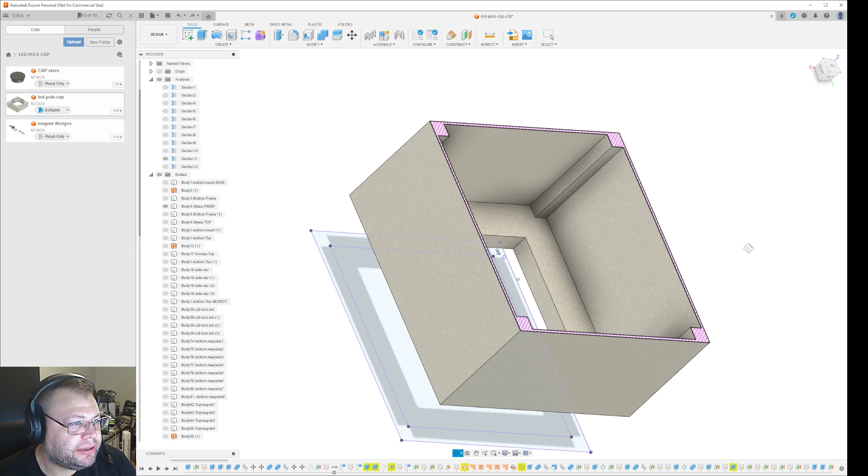So I have this model in Fusion 360, and what I found out is something I wish they could implement is what I would call a negative fillet. A negative round fillet, because if you use a fillet on this edge, naturally it would only be possible to make an outwards fillet. What I really want is to make this fillet inwards. Sorry, because I want to make like a smooth circle here from this surface.

Now the reason I put this is because I had to make the wall smaller, and when you then make it so small you actually get an opening on the side here, because it's too small when you get it down to a certain width. So in this case the wall is just 1 millimeter. And I want to round the edges inwards. I don't want them to sort of stick outwards.

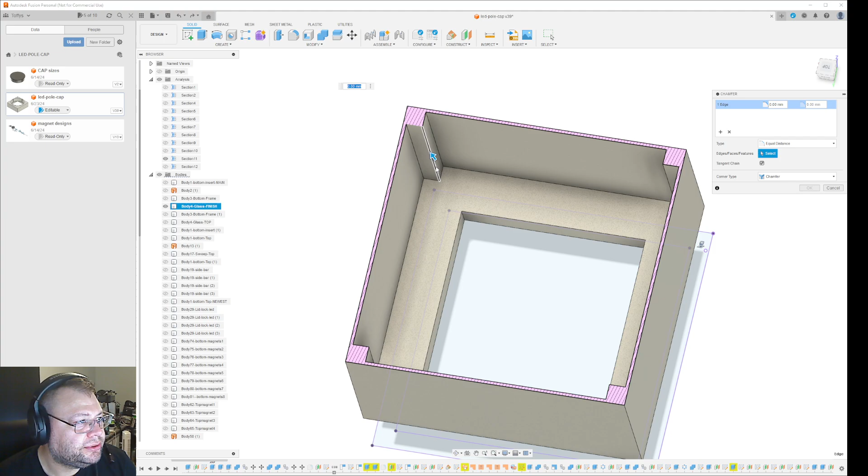Now the only way you can normally do this is by using fillets on inside corners. But if you fillet this one, you will only get it there in the middle. So the way I go around this is a small cheat. You have to do a chamfer first, because you have to remove that edge in a way. So you chamfer it and you bring it all the way back to the edge where there is nothing else, and then you just press OK. So now you have a straight side there, and you have two sides.

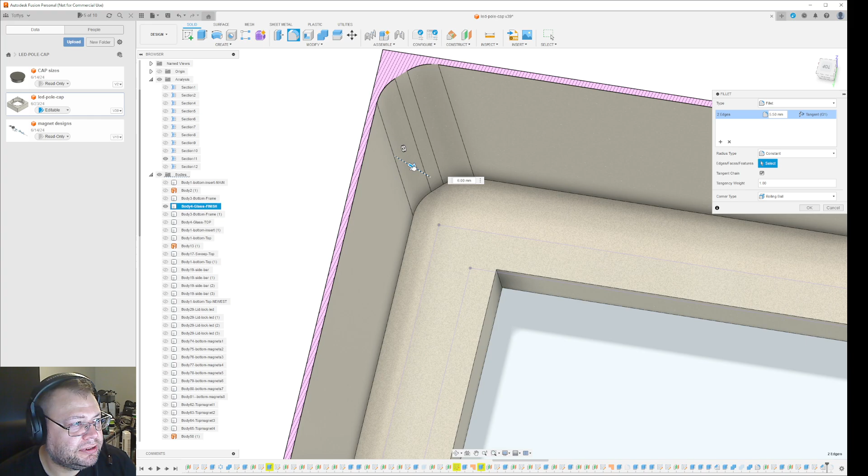What you can do now is that you can easily go in and do another fillet, but this time it will interpret it as sides that are going to give an inwards round fillet. So when you then push and pull, I will get a round edge instead.

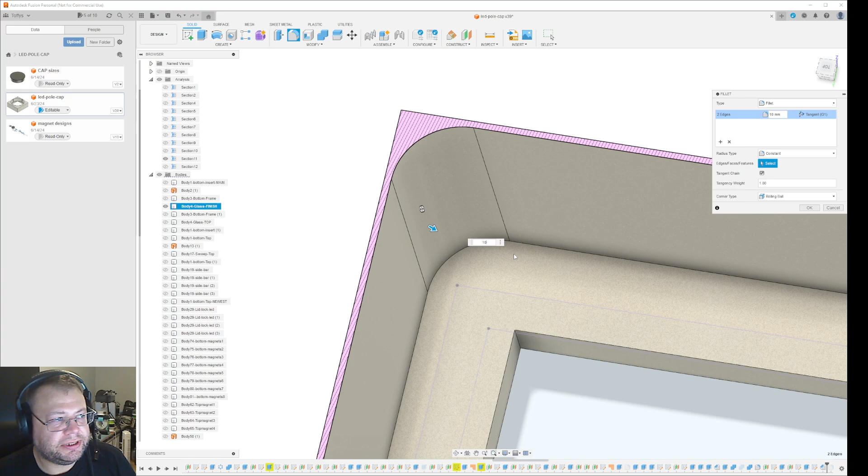And then basically you can go in and, sorry, I have a cough. You can just do the same process on all the corners like that, and then you just modify the other one you had like this.

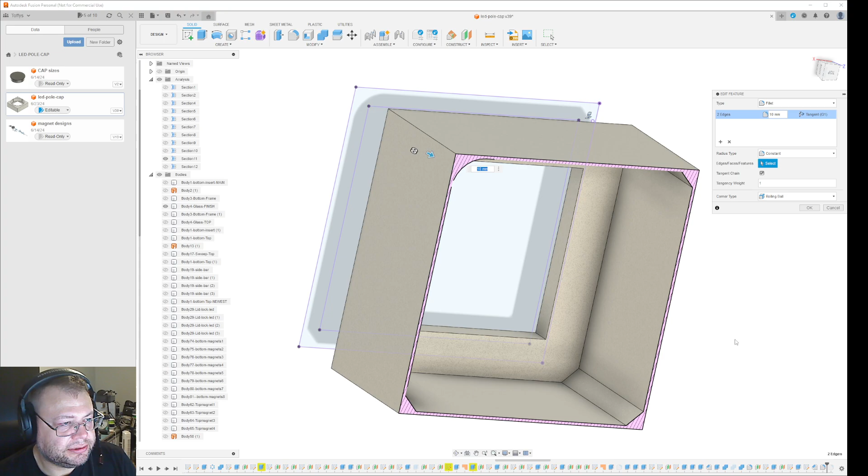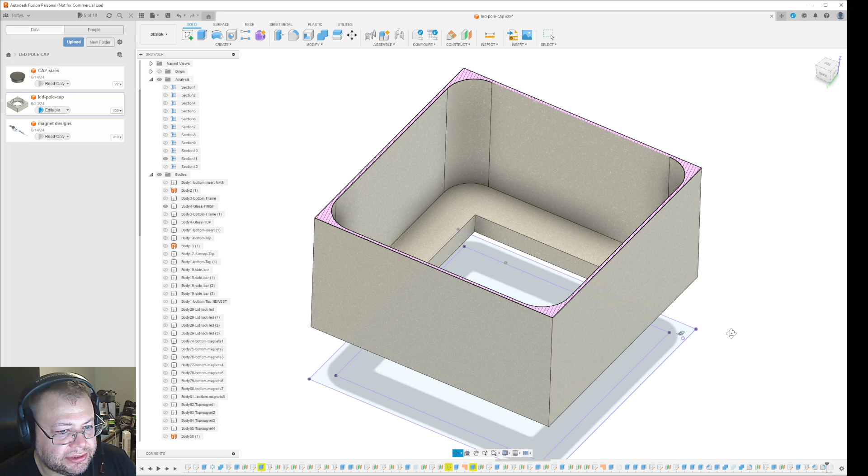So that is how I figured out how I could make it sort of inwards. It's a bit of a cheat, but I wish that Autodesk could make it so that you could make a negative fillet. So instead of filleting always around outside, it will be possible to change the direction of the fillet so it goes inwards instead. So when you push or pull it, it will go inwards into the object. So if you have a square, you could basically make the lines go inwards. Like the edges could be folded inwards, not outwards always when you do a fillet.

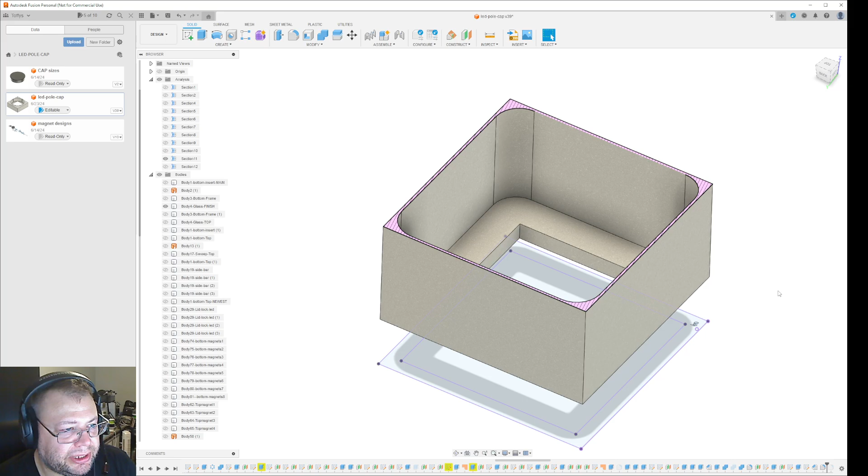Haven't found any way to do this in Fusion except for doing it like this. So I don't know if anyone at Autodesk views my videos. I really don't think so, because I'm so small. But if they do, negative fillets would be really sweet.